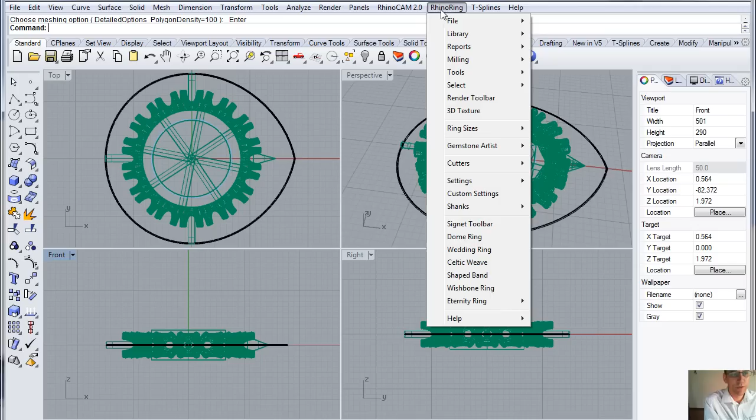Thanks to Keith of Cadwax - it's called Rhino Ring now, I think, that little fella up there. I took my idea to him because he's a pretty good coder, and he's very open to new ideas

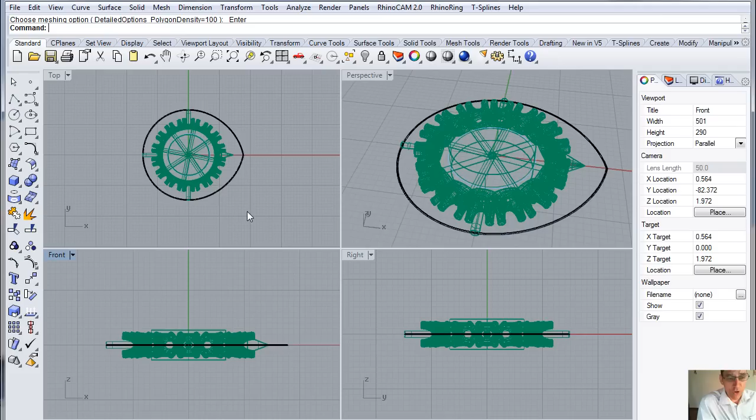and a nice guy to boot. So I explained what my needs were, sent him a bit of a video and also my DeskProto project files and the requirements of this project. To show you first of all what it does and then the usage of it, let me just shoot a bit of a clip.

So we have a ring over here. Before I start anything else, I want to make sure that people downloading the script from Keith understand this is not a one-button solution. If you don't know how to mill and you don't know how to work with DeskProto, this is not going to help you - it's not going to do anything for you except probably break a lot of cutters.

and maybe ruin your equipment if you don't know what you're doing. The DeskProto project files I've written handle about 90% of the type of work that I do. This may not represent the kind of work that you do - you might do a lot of biker jewelry and your rings are going to be bigger than the envelopes I've created.

My output is Mach2/3 in millimeters, and you might need a different post processor. So I give these project files freely, no problems at all, but I'd urge you strongly to open them, check your settings inside, and make sure you're not going to break cutters or do anything silly or stupid when you run them. That being said, let's get going on it.

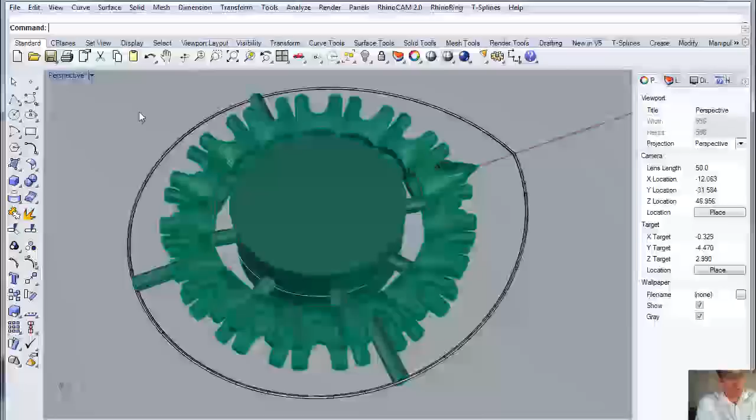So I keep the little indexing pyramid in there, and what I found with DeskProto - to try and simplify things, if you write a script, maybe Keith can do this, I'm not sure - if you export now to DeskProto, it doesn't take the curves with. You have to then go manually, grab the curves, export them as DXF curves, and then import the DXF curves into DeskProto - it just becomes a long-winded way of doing things.

So what I've done is the curve that represents my ground plane is inside there, and I just pipe it with some arbitrary amount, I don't know, 0.1 mil, whatever it is, so that it's a piece of geometry. I've asked Keith to script this so it will mesh this, including that curve and the little supports and the indexing pyramid. It'll mesh it all out, dump an STL into a folder, and start DeskProto with all the geometry in place by loading a predetermined project file that I created for DeskProto.

That project file will set up a 10 degree 0.127 millimeter cutter. It will also set up a 3.17 millimeter cutter. The 3.17 will do a roughing pass with 0.3 skin, and then the 10 degree 5 thou cutter, the 0.127 millimeter, will come in and run a finishing pass across the whole lot.

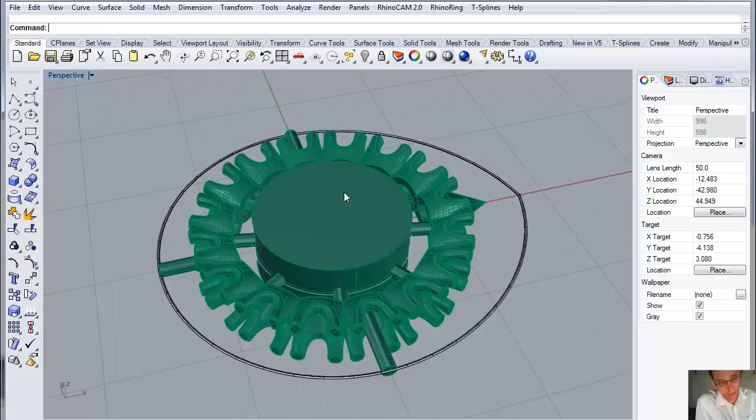It does not cut your keyhole. I've left this blank on purpose because you will need to inject whatever code it is you need for your keyhole. Some mills have got 3 holes, some have got a square hole like mine, some have got 2 holes up the middle - the Proto Wizard one's got a triangular hole in it. I cannot cater for everyone's milling machines.

That being said, let's have a look at how this works. So you've set up your internal supports for the rotary pass, you've set up your external supports to hold the model into the wax, and you've taken what would be ostensibly your ground plane - the ground plane curve or your milling window that you don't want to exceed - and you've piped that.

Alright, so let's go to Keith's job now. We go to RhinoRing, we go to milling, and we go to DeskProto. At the moment we're busy beta testing this, and I've only created the two templates - one to do a flip cut, a cut at 0 degrees and a cut at 180 degrees, and the other one to do a rotary on that same part.

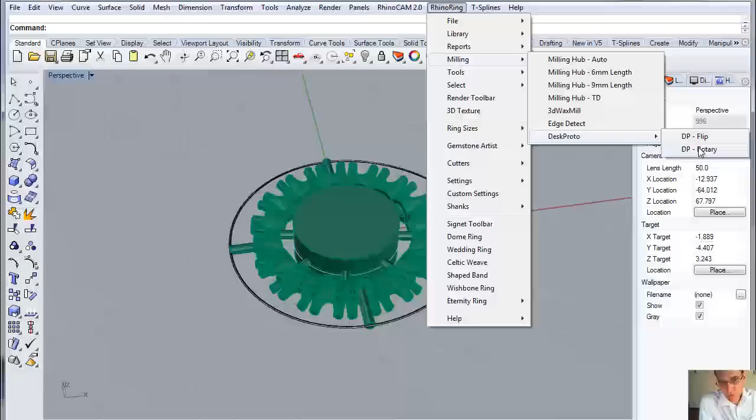So obviously you would start out with your flip, so I just want to define what the parameters of a flip are. Those of you with milling machines would know that I'm looking at the top down, and this piece is oriented - the rotary is over here, and your wax block is facing away from the rotary like that. I call that a flip cut. Refer to your own documentation for whatever it is you call it.

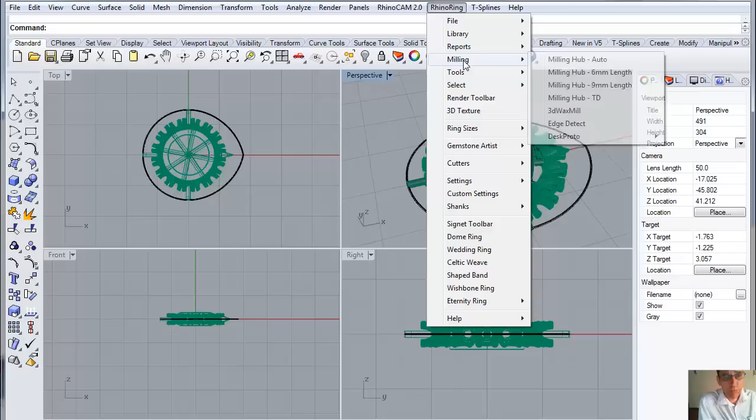So with that geometry oriented, I'm going to go into RhinoRing, and I'm going to go to milling, and I'm going to go to DeskProto, and I'm going to go to flip. The command line says select the objects, so I grab all of this and I press enter.

Previously, what you would have been doing in this case is grabbing that, exporting an STL, copying the STL to a folder, opening DeskProto, importing it, setting up your operation and part parameters, and then generating the mesh and path.

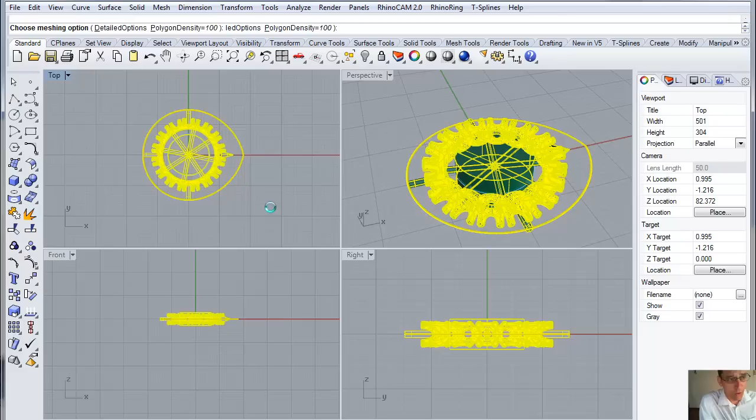This script and the project files have automated all of that. Once you click that button, it will open my template file with all the parts already there and the geometry injected. All you need to do now is go to options, create, extra, and calculate all toolpaths.

So what will happen now is it'll generate all these parts at one go. To explain what these parts are, all of them are written - you can go in and double check them. There's the roughing pass, everything over there is cut, and there's the flip. I've already put in under advanced all the settings to do a flip.

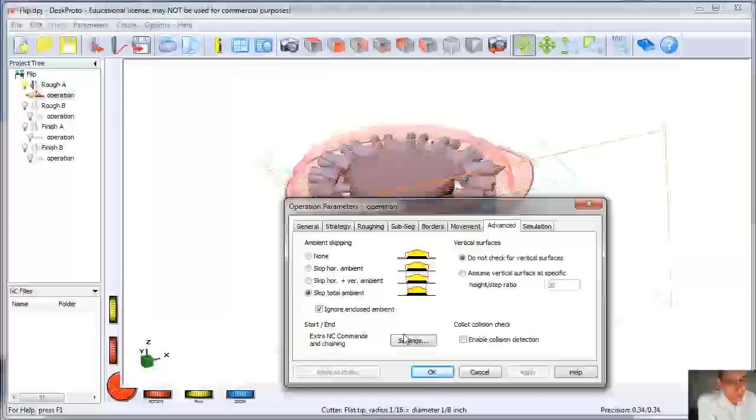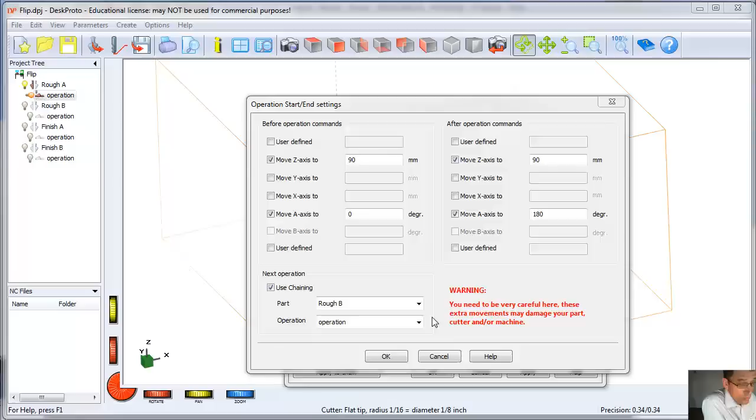For those wondering what my safe Z was, I've put in 90 mil. You know your milling machine - if it can't go up 90 millimeters, you need to put in whatever value works for you. So to reiterate, if you don't know how to use DeskProto, I don't recommend you use this until you've checked the project files Keith will supply.

The warning from Lex - Lex is also a fantastic guy. Read that warning, because you can send your cutter straight into your rotary face and break stuff really, really badly unless you know what you're doing.

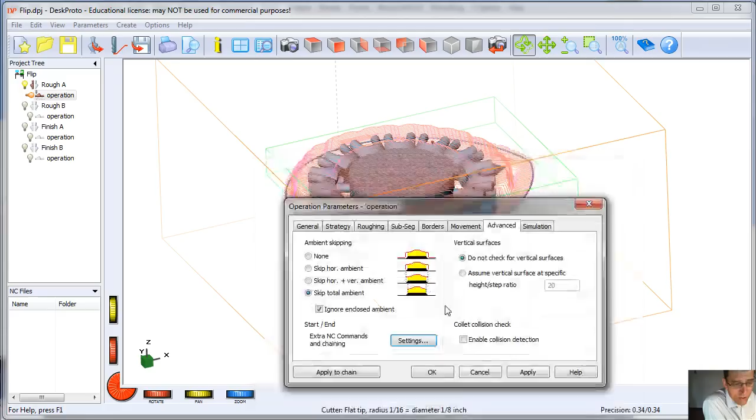This will work for all the Minitech mills because we have quite a big Z limit, but you need to also understand that if the ring you're trying to cut is more than 90 mil big and you only pull it away to 90 mil, you've got problems.

So like I said, this is not to replace learning DeskProto. If you do not learn DeskProto, or you do not know what you're doing in it, these project files can and will break your machine if used incorrectly.

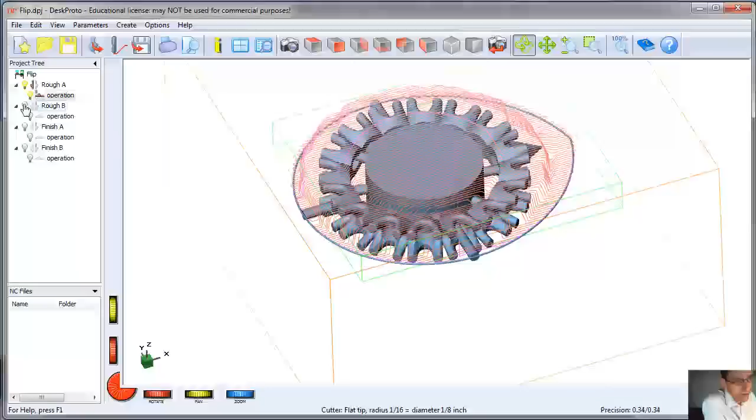All right, so that out the way, let's have a look at what we've done. So we've created the roughing, we've done that. Here's the finishing. To tell you what tools I've used in here, in this operation I've used a 3.17 mil or 1/8 flat end mill with a 0.3 step over and 0.3 skin thickness.

So you'll use your 3.17 millimeter end mill, it'll go in, chunk away all the bulk of the wax, flip it over, and we'll do the same on the other side.

This operation you would export as one thing. There's a bug or glitch in DeskProto right now that doesn't allow this to happen automatically. You can get us to include the automation of this, but instead of exporting these two as one path, it will export them as two separate paths, requiring you to concatenate them in Notepad. Lex has assured me that in the next version he'll address this.

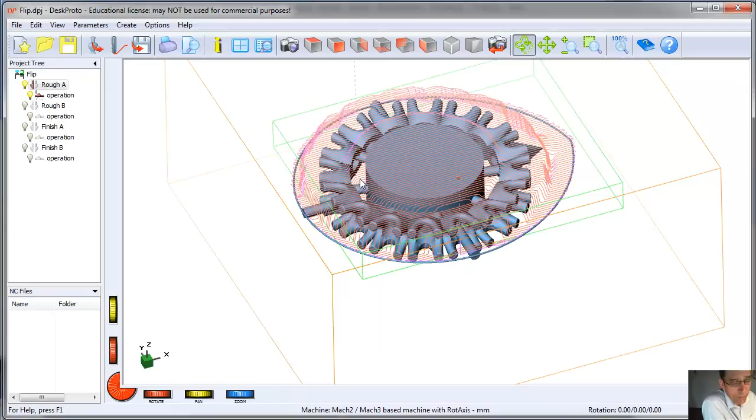At that point you wouldn't even see the screen - the path would just simply appear on your desktop. So from this point onwards, what you need to do is simply output your paths. We're going to click write the paths, put it on the desktop wherever your project is, and we're going to go flip rough.

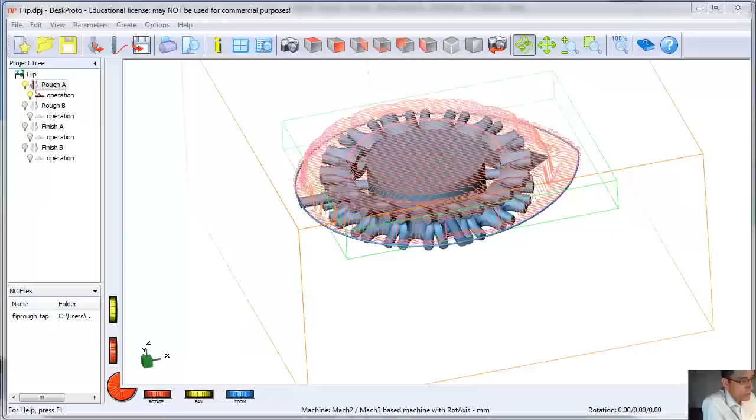It's warning you that this is part 1 of 2 - yes, we know about that, just go yes, and it's going to write that path. I'm going to open with Notepad and show you. Open, select a program, Notepad.

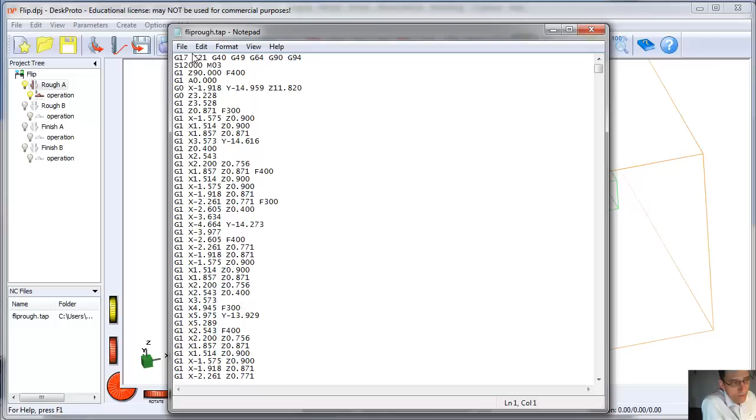So your path is in there, and like I said, if these numbers don't look good to you, it's probably because you're using a different processor. You would need to set that up in your project file and then save the project file out.

All right, and then you would use your finishing operation. So we'd write that one too - same deal. We're going to call it flip finish. Yes, and that path will be written.

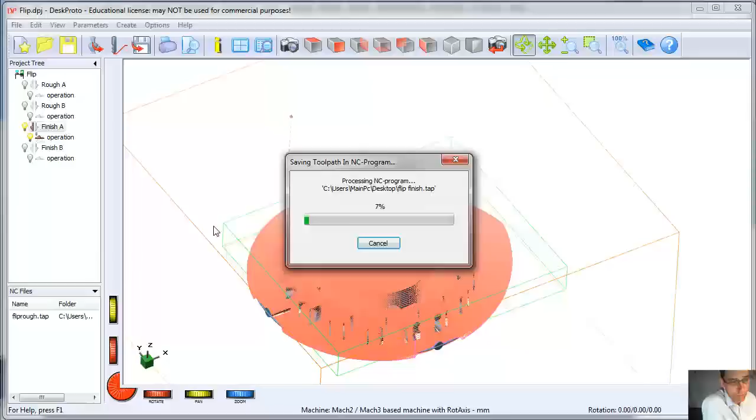So really the only user interaction you've had was to be in Rhino and click on DeskProto flip, and then come in here and go options, create paths. Really that's 2 clicks so far. So taking what can be a long tedious job and turning it into 2 clicks, I think was quite a successful project.

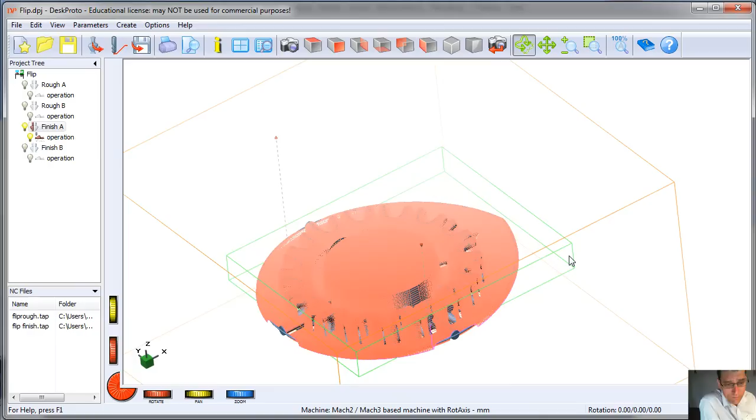Alright, so now to show you the rotary segment of that - this of course you would save to wherever your project's going to be. Go save as and save it somewhere else. Don't overwrite the original project files.

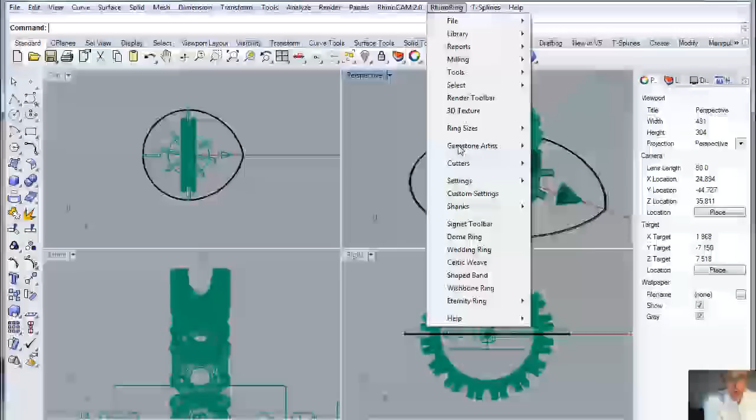So to do the rotary on this ring, I'm going to simply rotate it around F4, bring it up that way. Of course you need to lock it orthogonally. And we're going to go back into RhinoRing, back to milling, and we're going to go to DeskProto, and go to rotary. What do we want to mesh?

That is grouped. I'm not entirely sure why it's ungrouping it. To select it, like I said, this is still in beta, so you'll have to bear with us a little bit.

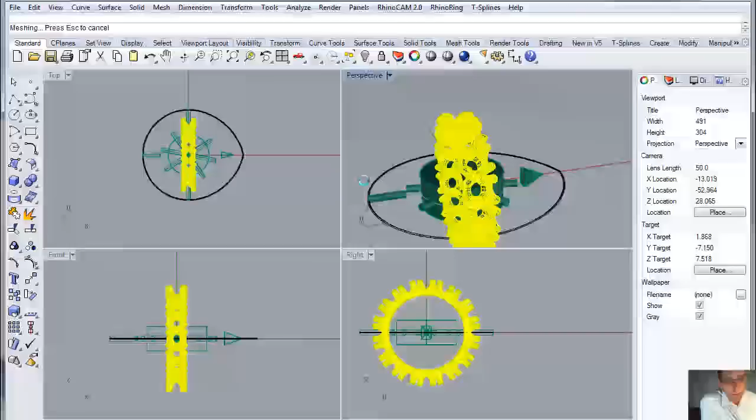Okay, so that's your rotary, that's the objects we want to mesh, exactly the same thing. All it's going to do is mesh it out, dump an STL into a predetermined folder, and open DeskProto in rotary mode.

Now, given that DeskProto is 64-bit and will happily run on the other side, my recommendation would be to start with your rotary pass, click on DeskProto Rotary, or whatever it is. Hang on a sec, let that go. Okay, so yes, go yes.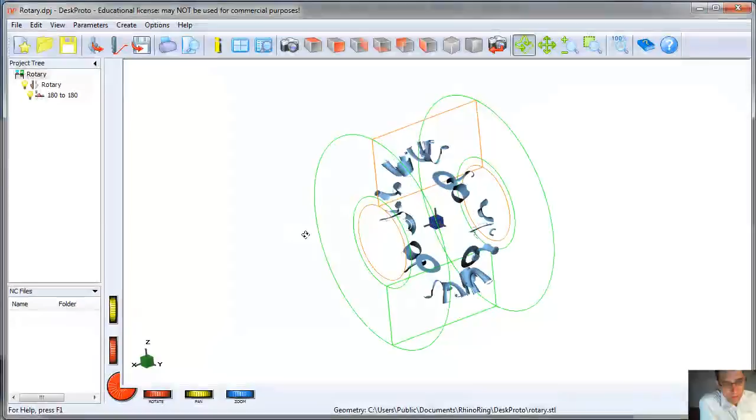Now, rotary parts are notorious for taking a lot longer than flip parts. So the way I would probably see this tool being used is for you to open up the rotary section first and go rotary parts, because this may take a while.

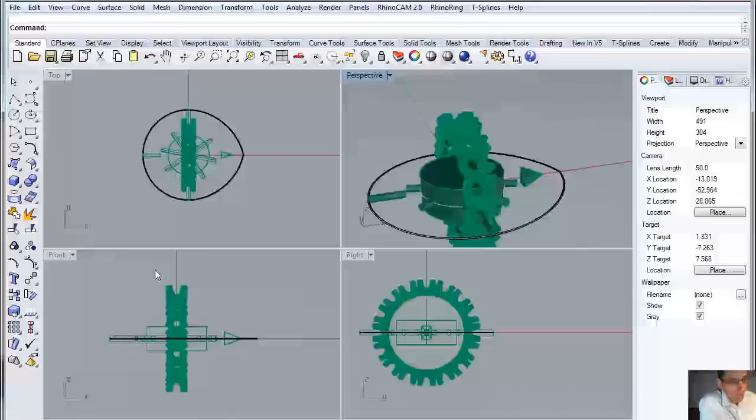Alright, so what I would do is go back to your Rhino, okay, and rotate around F4. I'd start with your rotary and then come back and do your flip.

So at this point I go back to Rhino Ring, because you can run it again. You go and go flip and grab all this geometry, press enter, and open another instance of DeskProto.

Let's see how the other one's doing so long. It's busy calculating. Now, the DeskProto project files that we're supplying have really loose settings. You may need to go in there and increase the fineness. I don't know, you are your own jeweler.

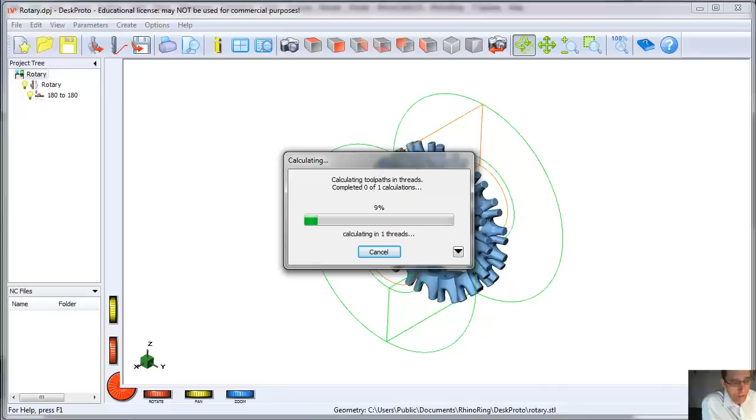You know what it is that you need to do to keep your customers happy. You need to cut it 20 micron step over, 30 micron, 40. I'm not going to guess that for you, because I'm not entirely sure what you need.

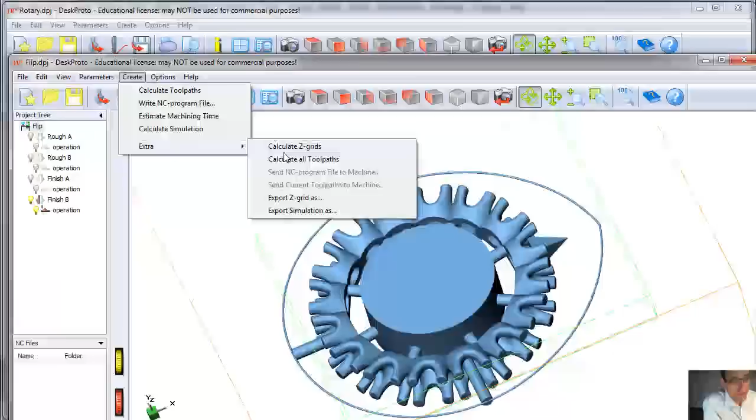So while that's generating the rotary path, you could have gone in and started doing this now. Extra, and calculate all toolpaths. So in the time we're sitting talking about this, one DeskProto is busy calculating the rotary, the other one's busy doing the flips, and that's all done.

Job finished. Now this one will take a bit longer because of the extreme fineness of the threads, the step over that I've put in there. I think I used 20 micron or 15 micron or something like that.

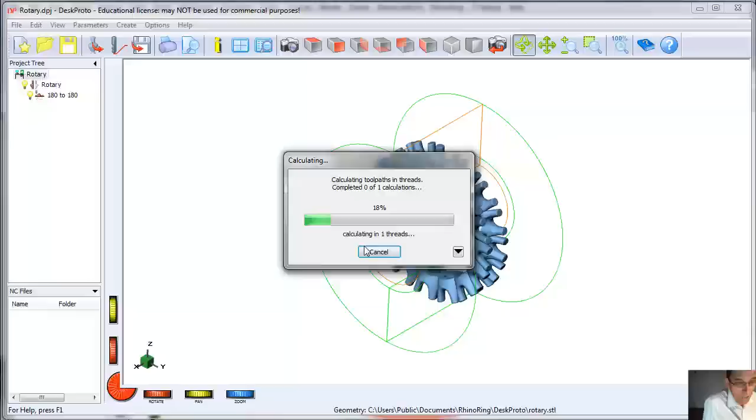But in the meantime, while that's doing that, you can be in here exporting these parts, and by the time you finish doing all of this and get back in there, you're probably ready to be done. Okay, so you've taken what can be a long, tedious job and turned it into 4 total clicks to generate the files that you need.

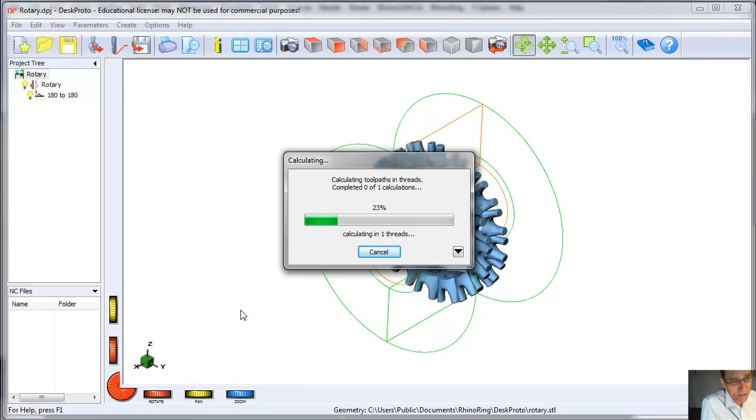Once Lex addresses the bug that stops this from outputting the NC files properly, it's going to be even less clicks. Okay, so I'm going to just cancel that for the moment and close that off.

And once again just to reiterate that this is in beta. If you do not know or understand what I was talking about now, I do not recommend that you use this tool. Go back to whichever way it was that you know how to make your DeskProto work that doesn't kill your machine.

This is an automated setup to help speed up a system that I know works very, very well for my machine. By all means, if you have a system that you know, and you can send me an STL file or something of what your normal setups are, and that's not working with this, I can increase the parameters and bounds in the DeskProto project files to take your size of projects.

If you know anything about DeskProto, you'll be able to go into the C drive, into, is it program files? I think it's Rhino Ring, Rhino Ring, no, in there, Rhino Ring, and I think you'll find the project files somewhere.

Is it in there? No, where have they gone now? Anyway, we'll have to speak to him about that, but there's somewhere in there a folder called DeskProto, and all these files are dumped into it.

So the script does work, but it is in beta, so I highly recommend that you double check the paths that are generated on your machine to see if they're going to work for you.